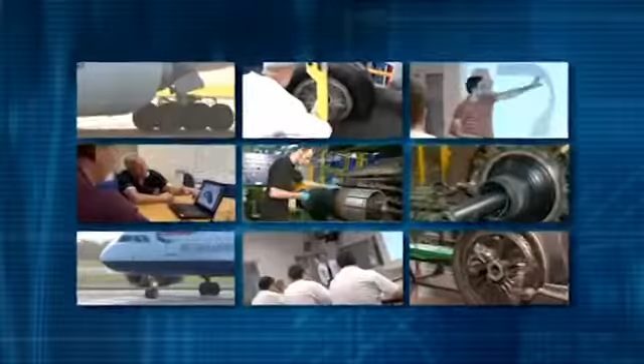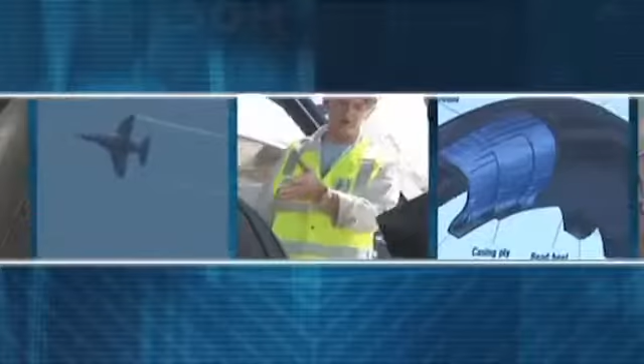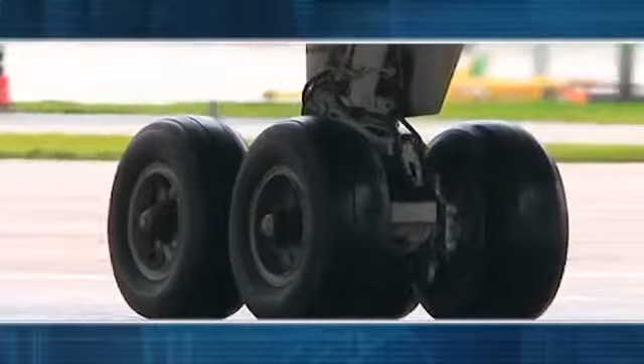No other company in the world focuses so single-mindedly on manufacturing and retreading aircraft tyres as Dunlop Aircraft Tyres. It is all it does, all it thinks about, all it devotes its time to. And no other company in the world can say that. For the tyres are the only part of the aircraft that is ever in contact with the ground, and despite spending so much time tucked away, for those moments during takeoff and landing, their role is vital.

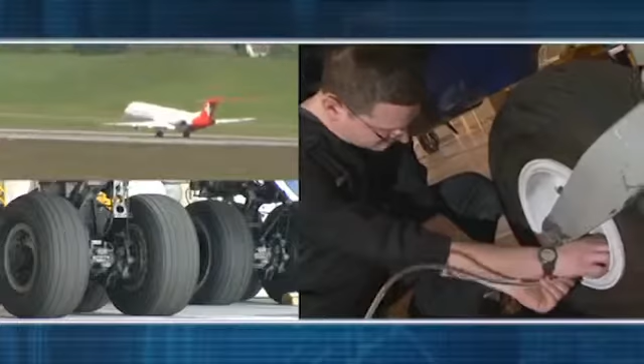Tyre performance matters. When an aircraft weighing more than a giant earth mover touches down at Formula One racing car speeds, it is always, without fail, an extraordinary moment. The tyres affect passenger comfort, safety and fuel burn, and tyres represent a major consumable item for airlines. Aircraft tyres are a specialist product. Manufacturing aircraft tyres is a specialist business.

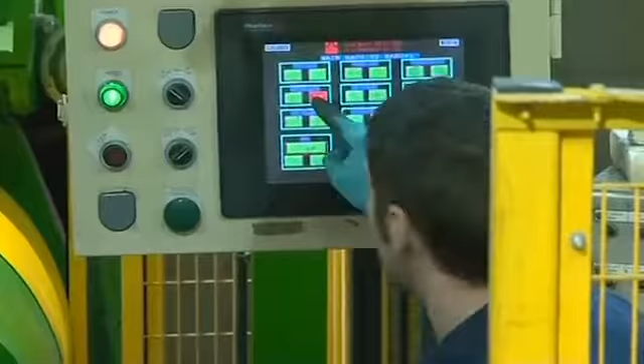Dunlop Aircraft Tyres is the only specialist manufacturer and retreader of aircraft tyres in the world. It is focused 100% on world-class aircraft tyres and nothing else.

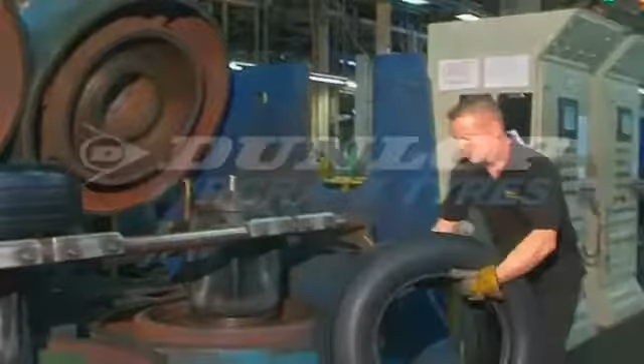Dunlop is a long-established company with a global reach. A combined manufacturing and retread plant in the UK serves Europe, the Middle East and Africa, while further retreading facilities in China and North America mean that Dunlop can support aircraft around the world.

The company manufactures tyres for small commuter turboprops through to large wide-bodied passenger aircraft. It supports military operators around the world with tyres for agile fighters, large transporters and everything in between, as well as providing tyres for general aviation, business jets and rotorcraft.

Dunlop Aircraft Tyres holds accreditations for its quality management system from certification agencies around the world. In total, Dunlop holds over 500 approvals covering 300 aircraft types.

The Eurofighter Typhoon, the latest generation of European military aircraft. Working closely with aircraft manufacturers, Dunlop Aircraft Tyres provides innovative solutions to meet the challenges posed by the latest generation of aircraft, from airliners to supersonic military jets.

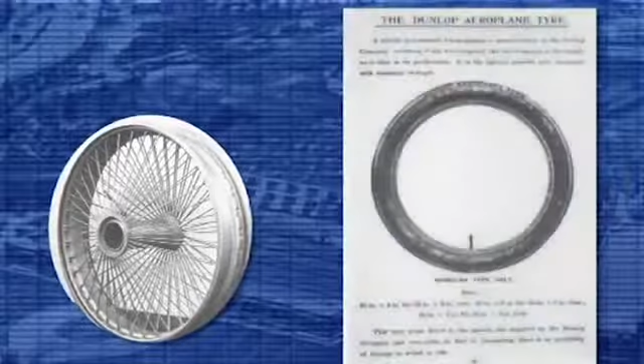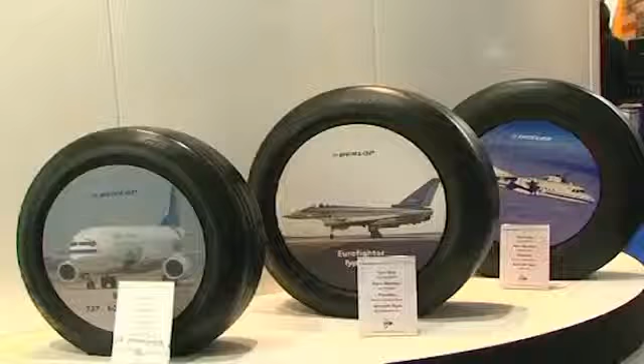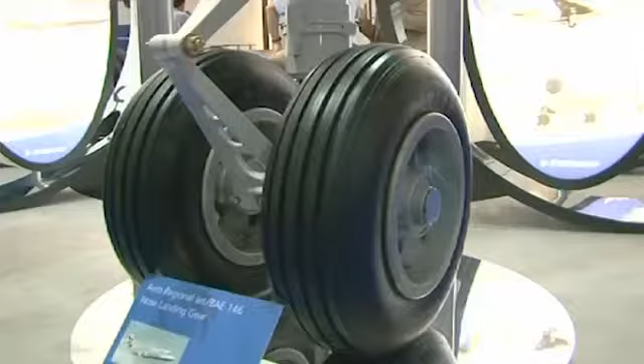From these early origins to the present day, countless civil and military aircraft have landed on Dunlop tyres. Since 1996, Dunlop Aircraft Tyres has been an independent business, and now, over a century after the creation of its first aircraft tyre, the company is the world's only specialist manufacturer and retreader of aircraft tyres.

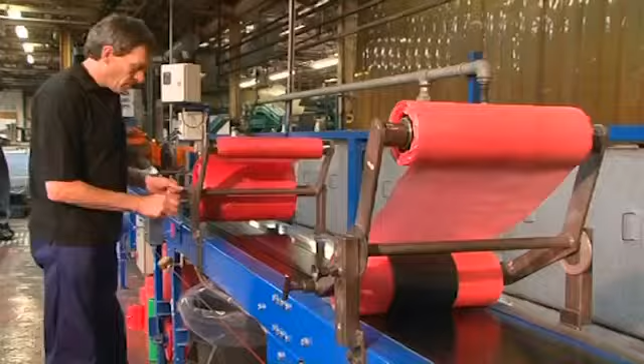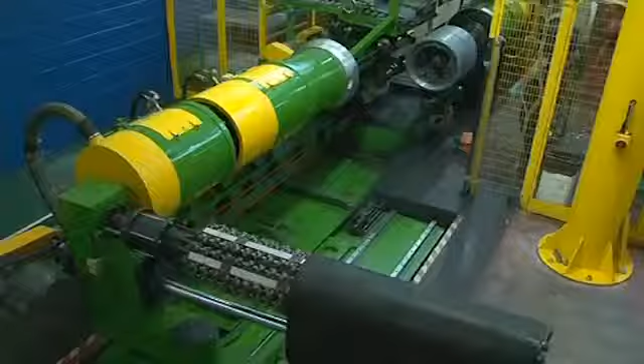The workforce is highly skilled and efficient, qualities underpinned by Dunlop's commitment to ongoing training and development. The plant features some of the most sophisticated manufacturing equipment used in aircraft tyre production.

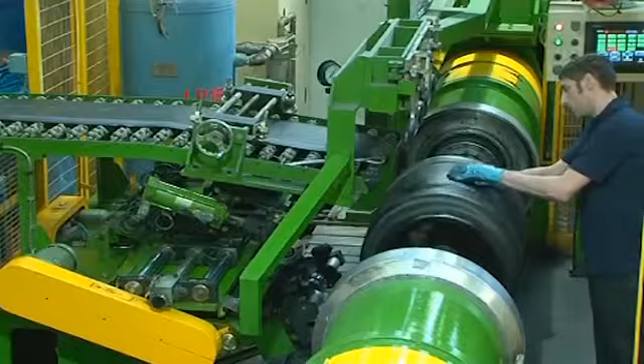This is the latest semi-automatic production equipment. Major investment in new technology has accelerated production time, further improving efficiency and quality. The company employ the best people in their field and give them the best and latest equipment.

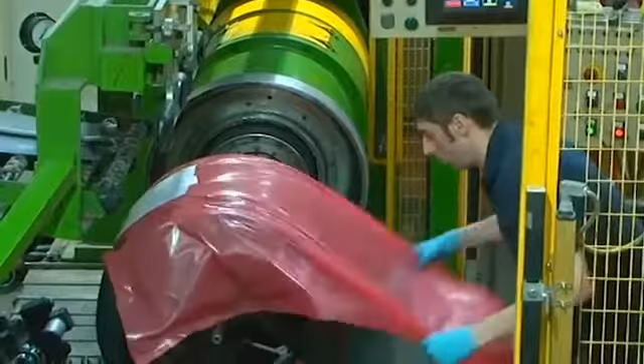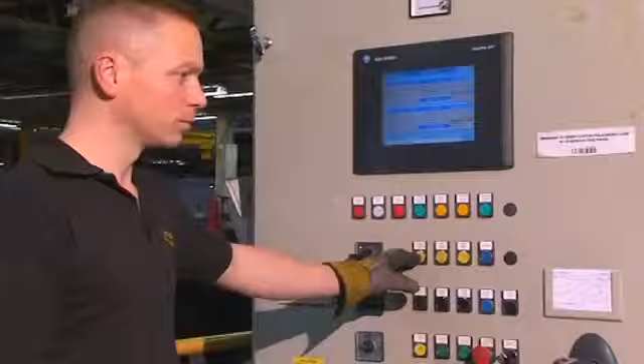Where appropriate, the factory has an unparalleled ability to manufacture efficiently in small batch sizes. This gives Dunlop the flexibility to switch output quickly to meet customers' needs, a unique advantage that cuts delivery times and improves service to its global base of customers.

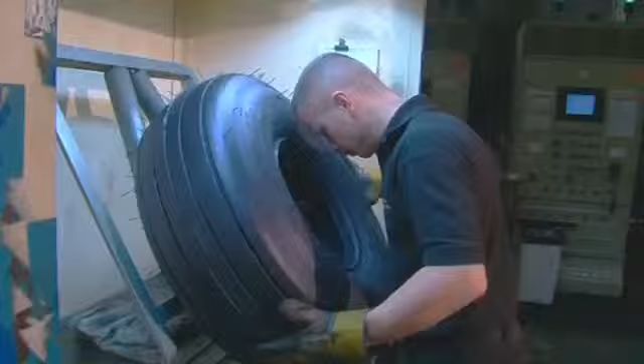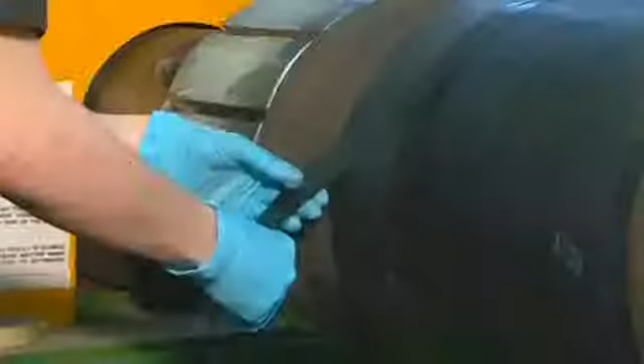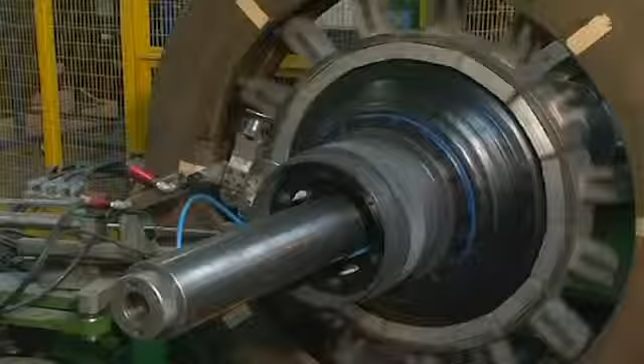In the fast-moving world of aviation, new product development is essential. Dunlop continues to expand its range of radial and bias aircraft tyres to meet the varied needs of operators worldwide. Be it a lightweight, high landing life radial tyre or a super strong bias tyre with enhanced foreign object damage resistance, Dunlop Aircraft Tyres has the knowledge and experience to develop and then to manufacture a tyre that is truly world-class.

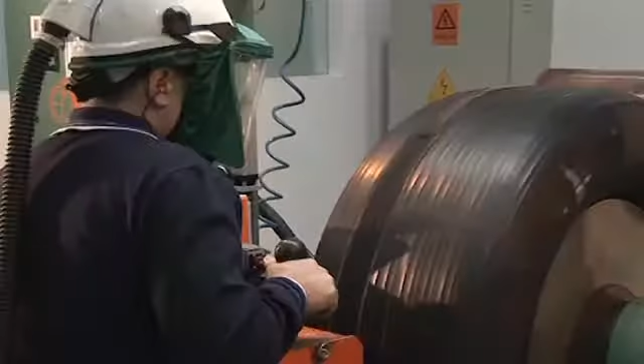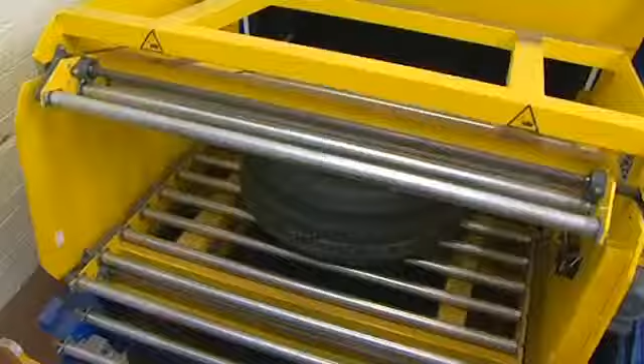Retreading is an integral part of an aircraft tyre's life cycle. The process maximizes each tyre's working life and reduces the cost of ownership for operators. Before a tyre is retreaded, it is examined carefully to ensure its suitability for the retread process.

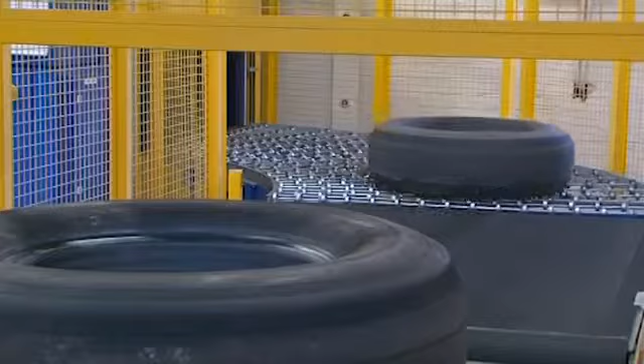The tyre undergoes non-destructive testing with state-of-the-art shearography machines. It is tested for air leaks and is visually inspected before being returned to the customer to be refitted to an aircraft.

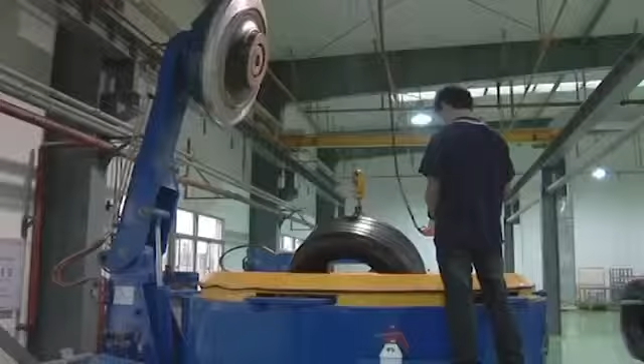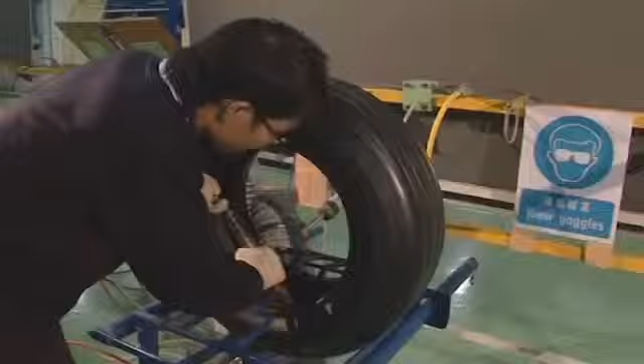Retreading sites around the world reduce transport costs and turnaround times for customers. The facility in China serves the Asia-Pacific region and has the capacity to meet the increasing demands of the region's rapidly growing aviation sector.

Dunlop can retread tyres originally produced by competitors and is establishing itself as a major supplier in this part of the world.

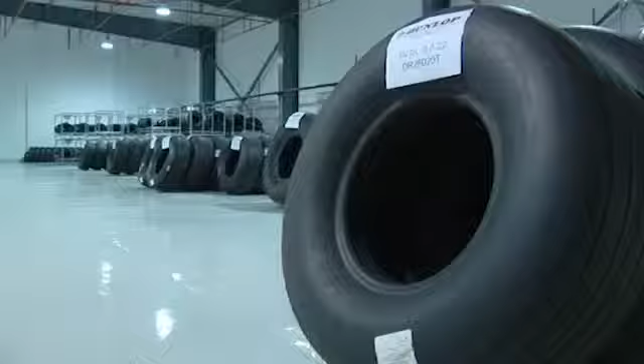Eventually, the tyre will reach the end of its service life, and when this time comes, Dunlop disposes of the tyre in an environmentally sensitive manner.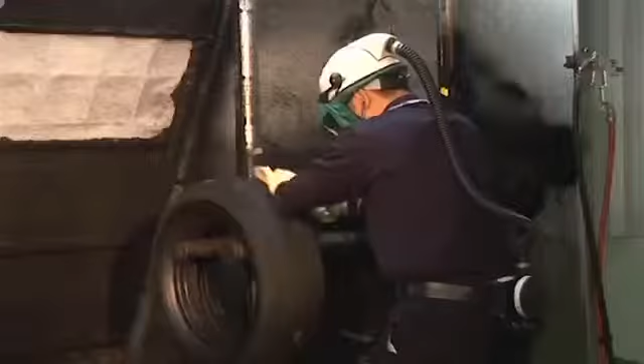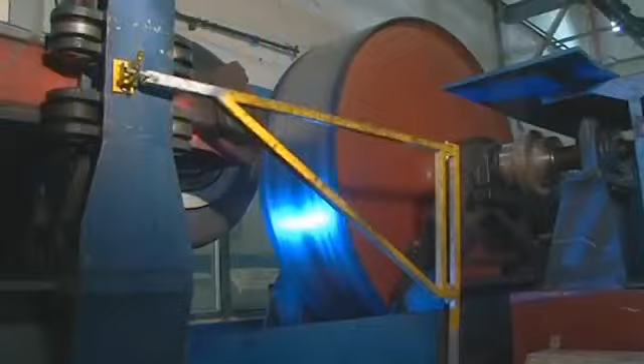Dunlop's obsessive commitment to manufacturing world-class aircraft tyres is ingrained in the company's DNA. The design team benefits greatly from its own in-house development facilities, which support a rigorous testing regime. This equipment speeds up the design process and helps the company to bring world-class products to market more quickly.

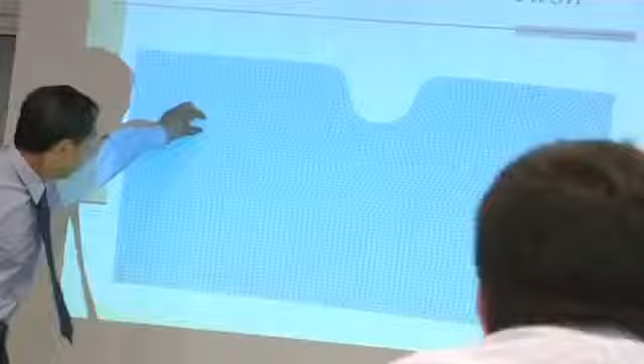Working with some of the UK's leading universities and partners, Dunlop is at the forefront of research into aircraft tyre technology. Here, Dunlop and Airbus are collaborating with Birmingham University to pioneer new methods of aircraft tyre modelling.

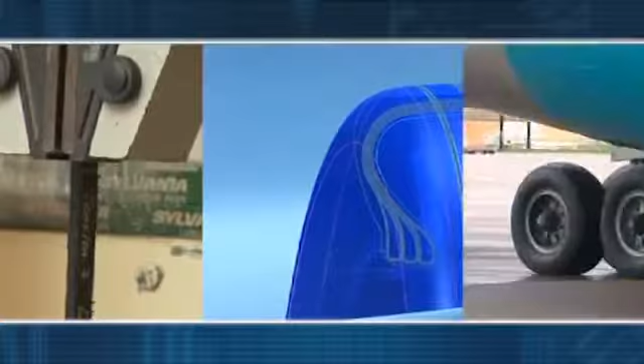Dunlop is also at the forefront of research into next-generation tyres, which will be lighter than tyres today, will offer increased landing life and improved resistance to foreign object damage.

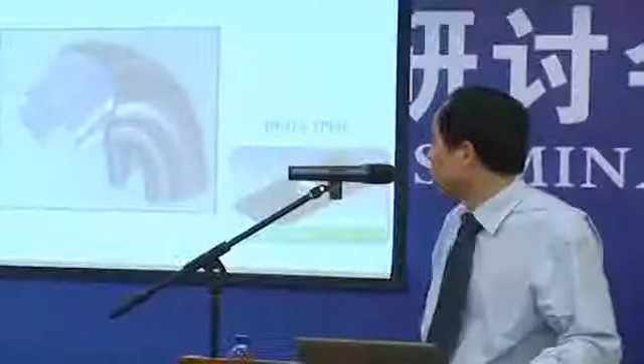Intelligent tyres will feature technology to monitor health and performance. This will enable aircraft operators to optimize the life of the tyre, whilst radio frequency tags will improve the efficiency of the supply chain.

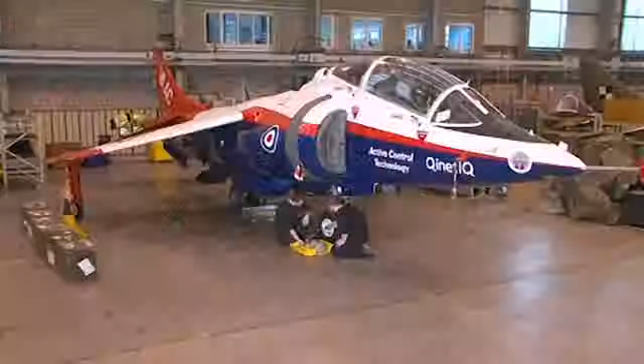Although Dunlop design, manufacture and retread the tyres, they are delivered around the world to be fitted to aircraft by operators or maintenance, repair and overhaul firms.

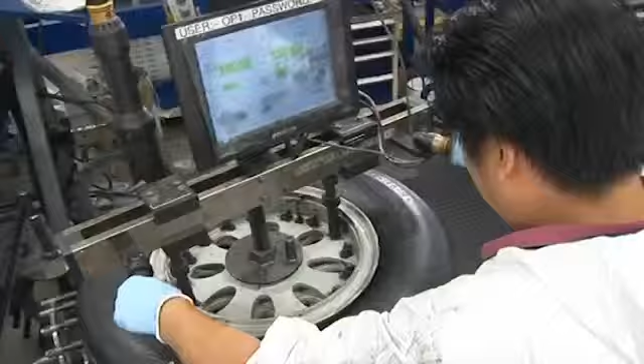And given the vital role tyres play in aircraft safety, Dunlop knows that this is where customer service and the personal touch really count. The company's technical support team regularly hosts seminars and trains customers to optimize tyre life through best practice maintenance procedures.

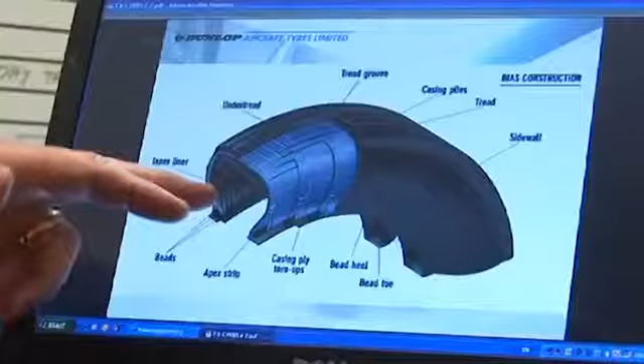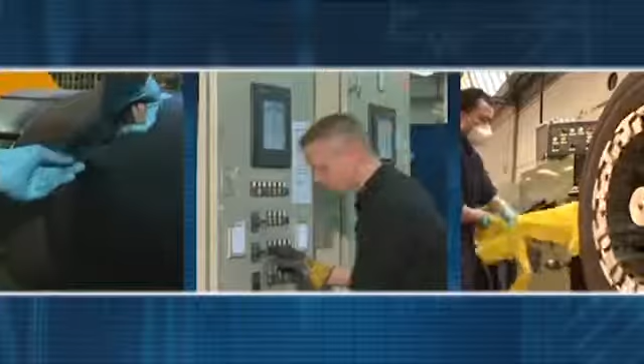Dunlop Aircraft Tyres offers a unique package, constantly developing new products, pushing the boundaries of aircraft tyre technology, over a century of experience in aircraft tyre development and production, and retreading operations across 3 continents.

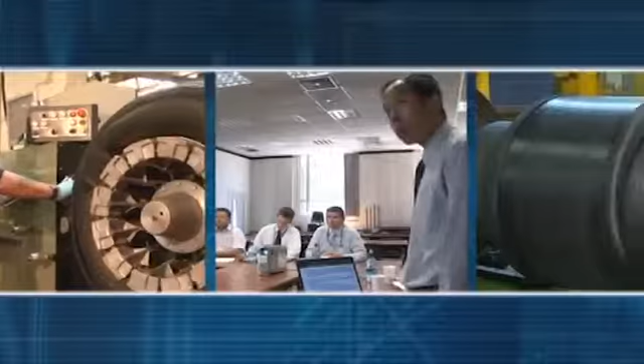It's all about first-class products with unmatched service. Dunlop Aircraft Tyres, world-class aircraft tyres, and nothing else.